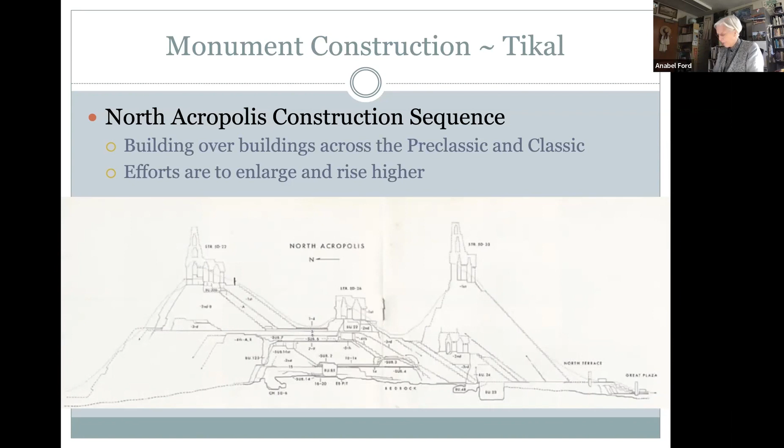So I give you a little sequence here drawn by Tatiana Proskouriakoff, a wonderful architectural artist of the Carnegie period—this work was done in the 30s. So she recreated this. Again, it's just looking at the architecture, not the landscape.

So this is earlier going to later. You can see that the construction builds over and up and bigger, but it's not creating lots of room—it's just making a bigger impression. Everything just moves bigger and bigger and bigger. The main pieces are still there, but it's exaggerated over time.

This one has a few palaces, so there is some interior space, but the platforms themselves are much bigger than the interior space.

Doorways are kind of important, so I wanted to mention that since you're architects. They use lintels, and for the most part—there are a few examples like at Yaxchilan—they have lintels that are carved monuments, in fact removed and taken to places like the British Museum.

I was there one time and I quite forgot—they only have one or two American section exhibits, and I walked in and there was one of the Yaxchilan lintels. I got close to it and looked, so close to make sure it was really the real lintel, and I set off an alarm.

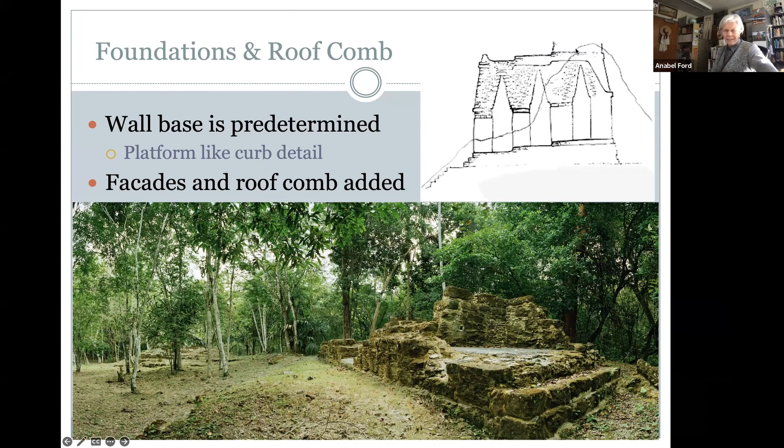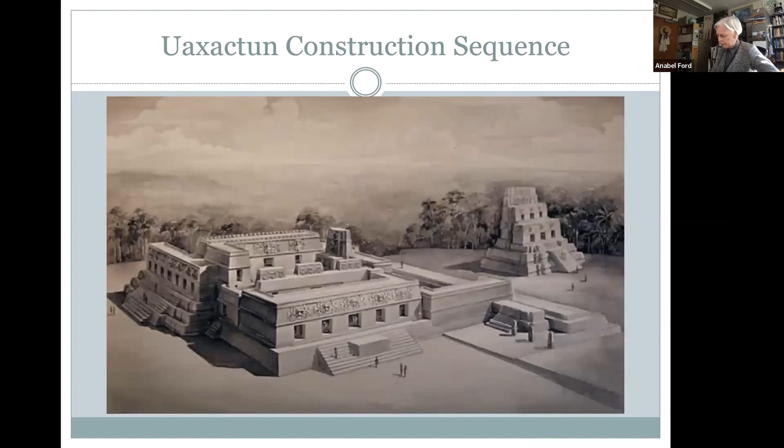It's the only structure that I really see at El Pilar that had a roof comb. These are roof combs - they're just to make things bigger, they're not structural, you can't go in them, and they probably are putting a whole lot of weight on these things.

This is another view of different ways they would be building. Of course, the solid buildings - I don't know if you've seen some of the buildings at Angkor, but they are also corbelled, though they don't have this seal and are rounded on top, where the Maya felt they had to add this detail around.

This is completely - whatever the difference between building a structure and architecture, according to Paul Bailey, a vernacular architect who worked with me for a while - he said architects want the art of the building rather than just making something functionally a building. So this is something that is the art of the building.

Another thing you've probably heard that I consider mythic is that the Maya had to cut down all the trees to slake lime. I'll talk more about lime later, but I want to mention that when you look at these rubble-filled walls, they have marl and rubble, but they're not filled with lime plaster. What they do is seal these elements with lime plaster, so they use lime very, very sparingly.

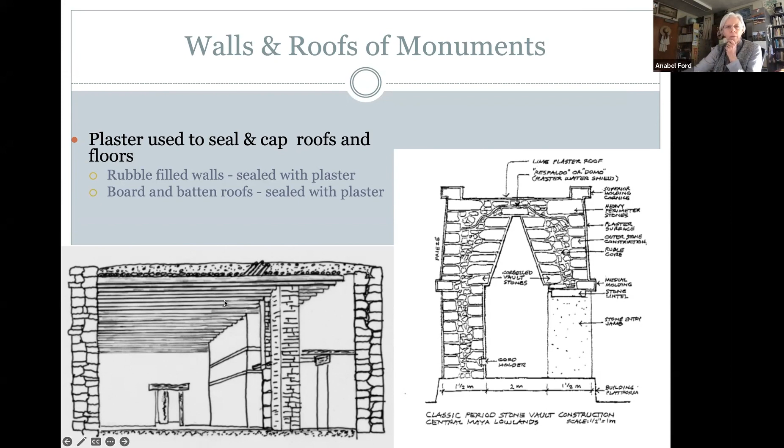Of course, the facade would be stuccoed. So this is rubble filled, and all those structures I was showing you would have been rubble filled, but some have board and batten construction. I suspect we see some of these possibly in the residential component, but mostly you see lower walls with thatching that goes up with poles. Still, this board and batten is another strategy that's seen.

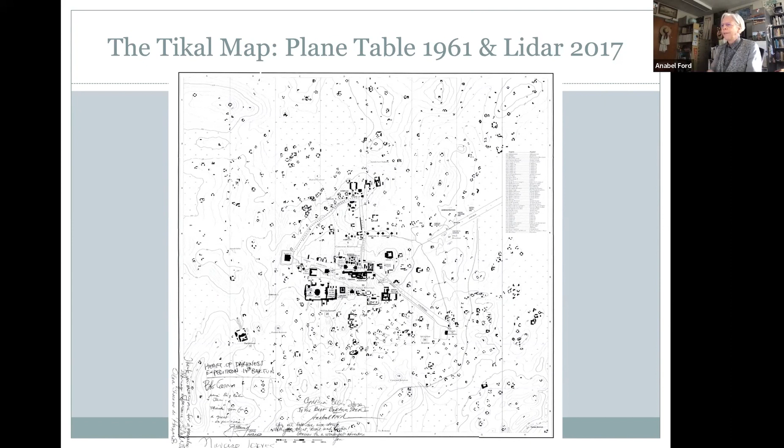They did different things, but today this whole place has been mapped using LiDAR, but if you look at the maps, they're very, very comparable.

They try to say you can see more with the LiDAR, but I don't think so. I think their map is extraordinary. What you can see now in the LiDAR is different than what it showed in 1960, but overall the map is superb. I mean, do you want to spend time with people or do you want to do the LiDAR? I guess we want to do the LiDAR now, it's easier or something, but the map was still very, very effective.

So one of the things, to build things of stone and rubble, you have to have stone. And the one thing we have tons of is limestone. There's no problem getting limestone.

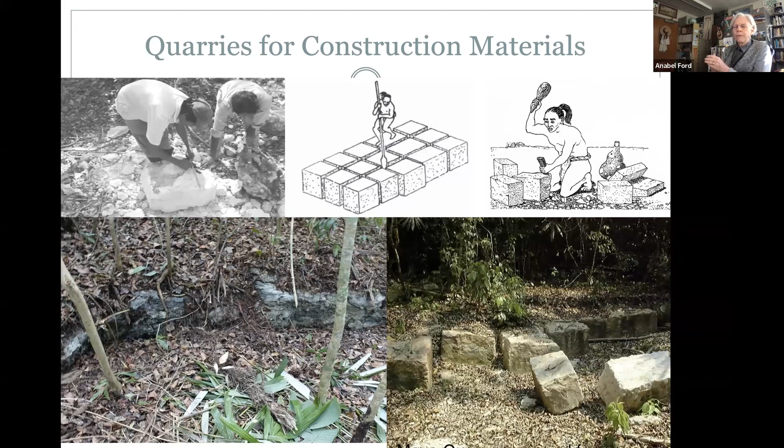I'd say scarring the landscape with quarries is an interesting thing. But you can see here, this is a quarry we mapped at El Pilar. This is a quarry that was reconstituted to get some rocks out. Here are some ideas of how it might have been, and this is us preparing some stones for use in the building I just showed you, what I call Sunun, the house site. So this is a building material that's readily handy. Of course, you do have to quarry, so you do create lines on the landscape.

This is an example at Tikal in this area. This is a giant temple. If any of you have seen Star Wars, the first one has a view that is essentially looking from this building out. And here, I think we found that there are some 200 quarries in this area. So they probably didn't do the whole of Temple 4 here, but it probably was a good contributor to the stone required there. You might want to figure out what the landscape looked like before those quarries were there.

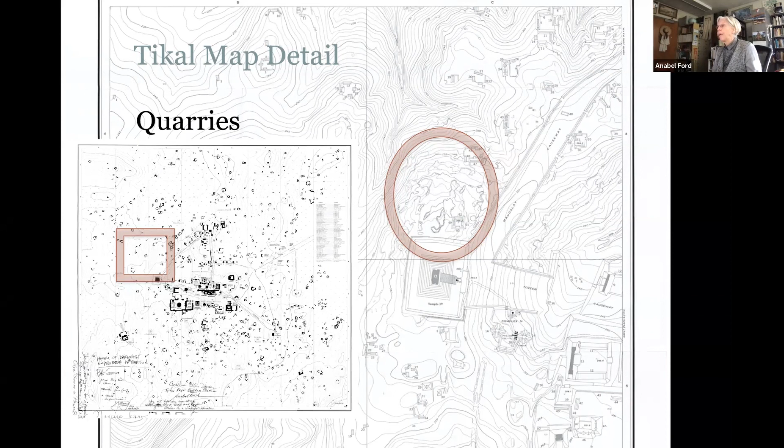Of course, the material of limestone can be slaked to lime, and lime is very important in the stucco and plaster floors. It's used considerably on the ceiling and is very important to the management of sealed spaces, you could say, from the household on out.

This has really been seen, the burning of lime for plaster, as a deforestation strategy. That somehow the Maya didn't notice the balance between needing lime for plaster and the forest they needed for other things. They simply, according to some archaeologists, would just deforest for plaster.

But really these are people who really know how to operate in the forest, because first of all, coppicing is just a big tradition and things resprout here. In fact, 8,000 years of people living in this forest would make me feel that the entire forest is responsive to cutting and burning. That would be a clear adaptation.

I did learn last year we were surveying after COVID, and during COVID there was this terrible fire that impacted El Pilar. One tree that does not respond well to it, even though it can usually resprout, is allspice, and it's a very important tree for condiments. It's interesting that it does not respond—it absolutely cannot tolerate even a nearby fire, I think. It's very unresponsive. But anyway, most trees are very responsive.

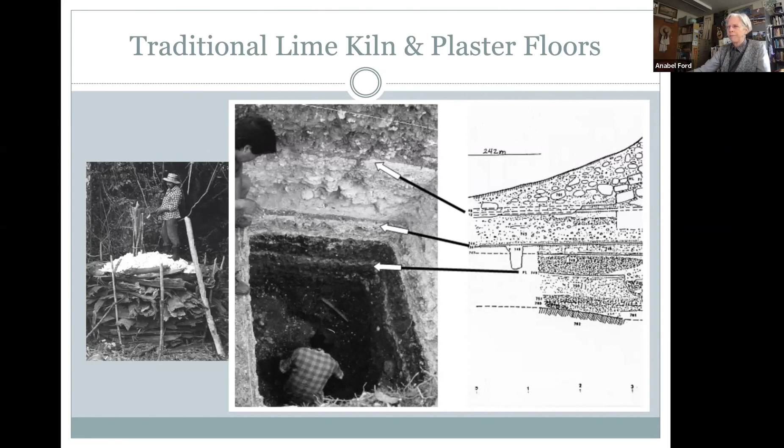I mean, so they weren't getting rid of it—there's much more to it than that. I don't know enough, but I would say there's a lot more.

It turns out that when we hit the first staircase out here, it was so beautiful we decided we'd go down and then start to go up. Instead, we found this very early floor, and we followed it all the way through. This is about 24 meters through. We just made up the little bits in between based on what we had, but this is how the profile looks.

This starts—the latest dates are almost 1,000 years ago, and the earliest dates are around 1,000 before the current era. So it's 3,000 years or 2,000 years—we're looking at 3,000 years of prehistory and 2,000 years of building here. The last ones are built 1,000 years ago, and the first buildings are 3,000 years old.

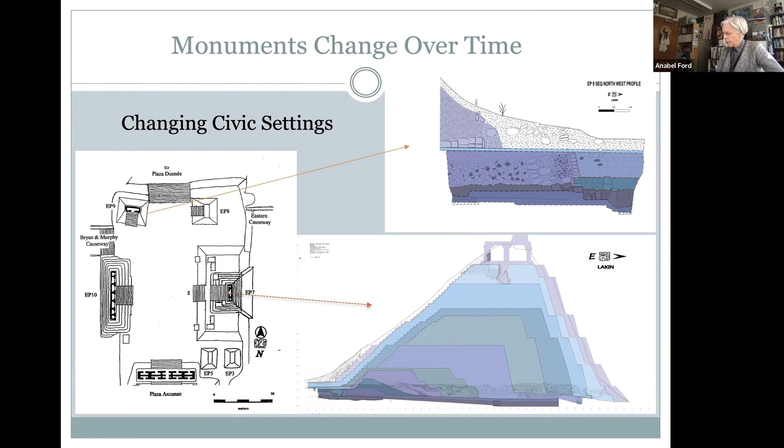Well, I'll mention another thing: unlike the Tikal example, these buildings are facing east while the final buildings are facing west. So there's a lot of changes going on in this plaza over those 2,000 years. This is a view using the LiDAR and our mapping. We've been mapping here since 2014, looking at settlement patterns. So this is El Pilar.

One thing architects sometimes look at are the axes of the monuments, and you can see how it changes. What's interesting at El Pilar is that the southern area is very publicly open, while the northern area is very exclusive and closed. So those are different ways that movement is inhibited. In fact, most entries into the north are almost like baffles, while it's very easy to walk through in the south.

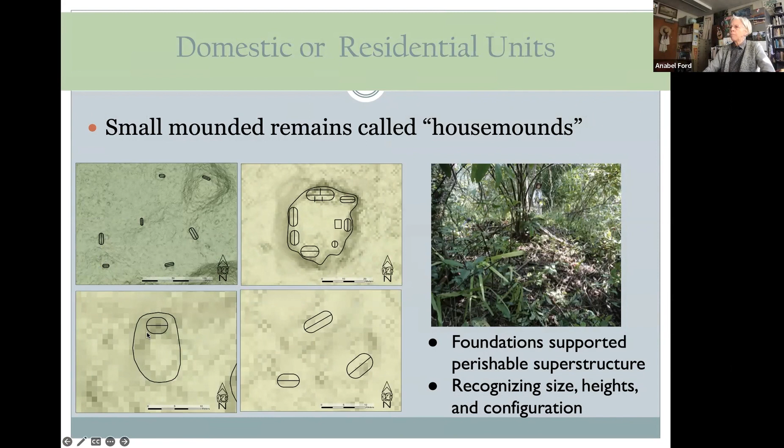These are what I call primary residential units. They range from a few that have one - like this single structure on a plaza, which we consider primary also, because of the investment in the plaza. We may not be seeing the other structures, so it's not fair to say just 1, but it'd be 1 on a plaza. So the equivalent ranges from 2 to 8, with a mean of 2.4, ranging into the higher, almost 3 structures.

This really is an example of how interior spaces are used. There's enough space for some important food things and probably fruit trees, and a number of different activity areas - open areas, wooded areas, orchards, and field crops. Beehives could be a nursery for plants, and of course today, a chicken coop and even washing areas. So you can imagine these things in the past as well.

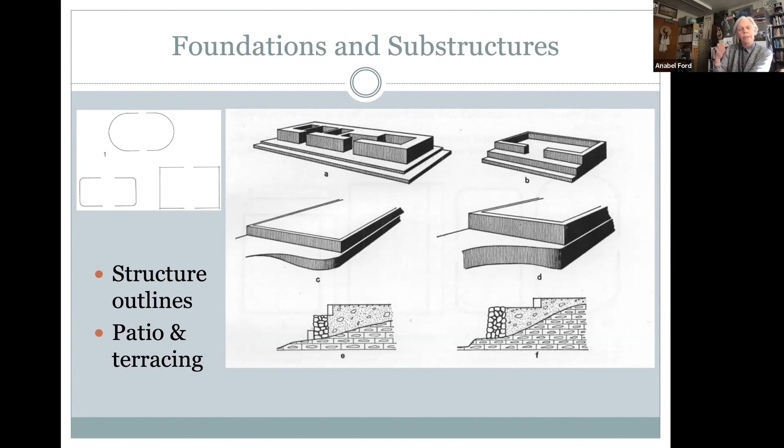A lot of these plazas, as you mentioned, can be elevated. They have different structure outlines and can be elevated and developed in different ways. Just showing here, terracing or building that platform - low walls that get the perishable structure above.

Here's some examples, this is in the Yucatan. You can see the apsidal form - I thought that was very beautiful. In fact, I think this structure at one time didn't have this walled in, and had it as storage, and then it was walled in and turned into part of the house.

What's interesting is the thatching they're using requires you to have rounded corners. If you make it a firm corner, you compromise the value of the roof, and it will always have troubles at those corners. I've seen examples where people have built model Maya houses where they've tried to make it more square, and they compromise.

They have leaks. That's where you'll always have leaks.

Just some other examples, things that might help with what we're mapping. This lower right-hand one has a real formal rubble kind of thing that you might see sticking around when you have a collapsed building, and different kinds of treatments of those lower foundations.

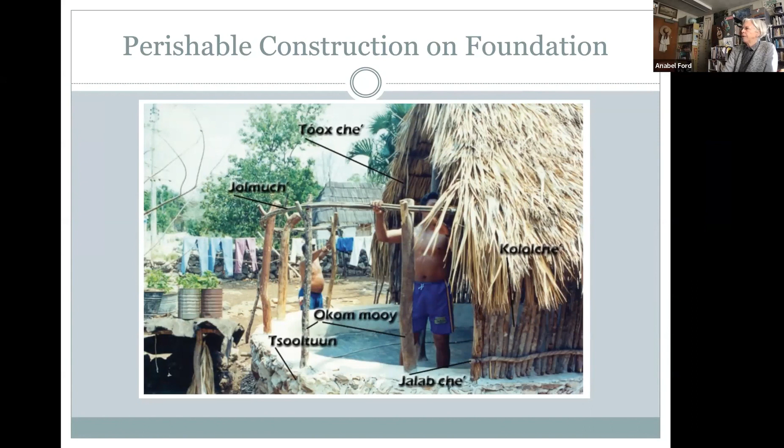Here's even one where they built out, I don't know how, it's interesting. I don't know the story behind this, but apparently they had it open at one point, and you can see the very formal, looks like cement and plaster flooring where they're building this apse or the end here. All these have names. I'm trying to learn them, I won't pretend I know all of them, but I do know those rounded things are called mooy, for whatever reason.

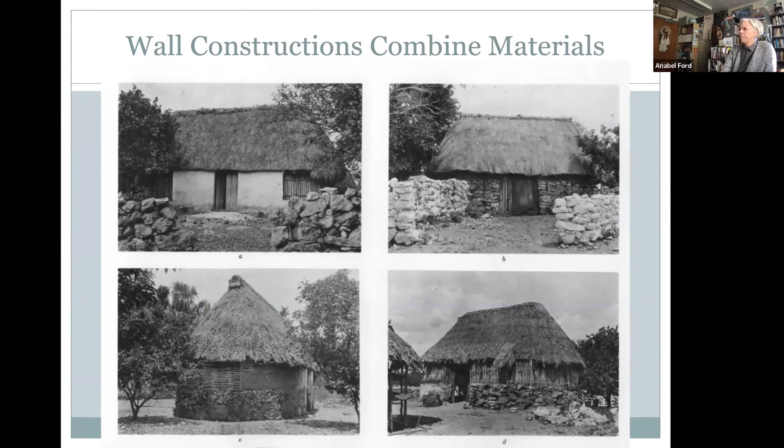Here's more examples of how we get house mounds. That's what I'm really looking at, the different ways of thatching and finishing. Thatching is really important. Here's two examples: in the upper one it's what we call the guano, or fan palm or bay leaf palm, and the lower one are corozo palms. With corozo palms you must make them square, you're obliged by the way the roofing material works to create them in a squared way. Where I work, the preference is for fan palm, but corozo exists. In the South there's no fan palm, so they always use corozo.

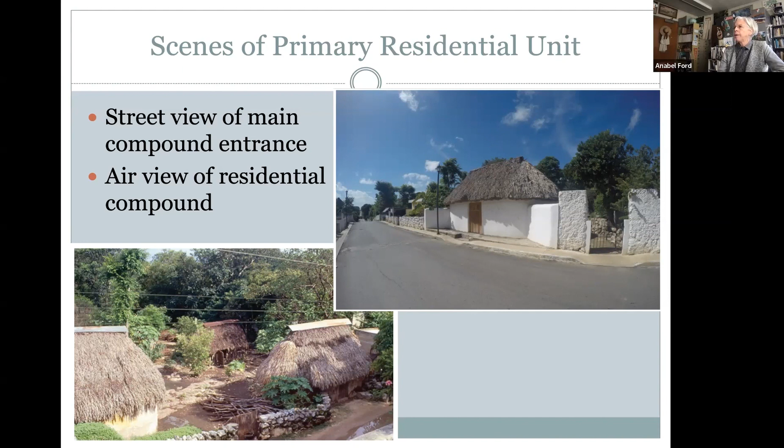Now I want to move to interiors, and you can see how there are multiple structures in these interiors. They're compounds, lots of different things happening. I showed this picture in the lower left to my team and said, this would get us confused - is that a structure or just those stones? How would we map that? Just different varied wall treatments, different kinds of features they're collecting or using. It may be that's just a bit for some next construction, or maybe a result of quarrying.

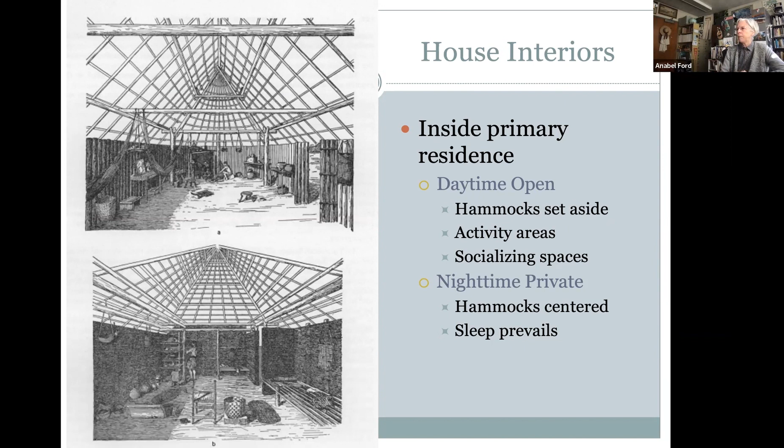These interior spaces are for activities that need to be inside during the day, and then they'll move the hammocks and it becomes the dormitory in the evening. So it's really a multi-purpose room, but not a kitchen - that's really important. Kitchens use fire, and to control where fires might be, they keep the kitchen aside. So now, not just kitchens, but all kinds of little ancillary buildings will be found for various purposes.

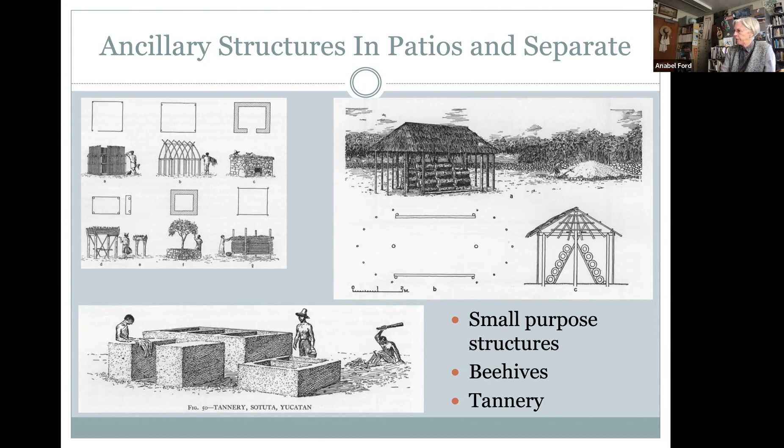I know there are kinds of trees they say are good for tanning, so that might be a kind of thing they have. But beehives are very, very important, especially at the time of contact - the Spanish couldn't get gold out of the Yucatan, but they could get wax and honey, and they were really keen on sugar. So honey was very important, and wax for ecclesiastic affairs like candles and so forth. So it's diminishing the use of the Melipona, the local bee, although people are trying to resurrect it.

It shows that they were managing water, always having it be perennial - the rainforest has flowering at all sorts of different times, so there was enough pollen for the bees. If beekeeping was important, there was management of water and flowers, we'll say. This is a kiln, probably influenced by the Spanish, but they probably could have had things like that. And then this other thing is called a sweat bath, so we know they have sweat baths - that's another kind of patio use.

Out in these peripheral areas, they'll have corn cribs, and these little seed beds for nurseries. Of course, these look less formal, less likely we would find them archaeologically, but some of these get more formal with some amount of foundations.

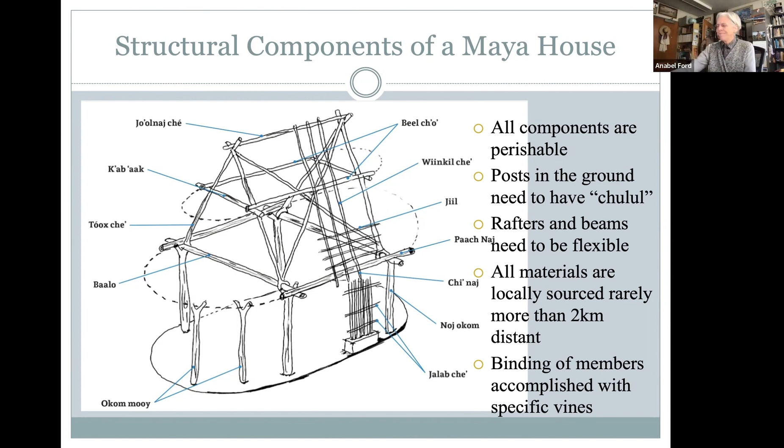So if you have a house, you need posts that have the heartwood, and you need vines long enough to bind. You can splice in, but there has to be a certain minimum length. It's interesting to me that if you burned a field, you won't have vines. If you think of the whole area as agriculture, you won't have vines, you won't be able to build. This is a rainforest - I don't know, it might rain.

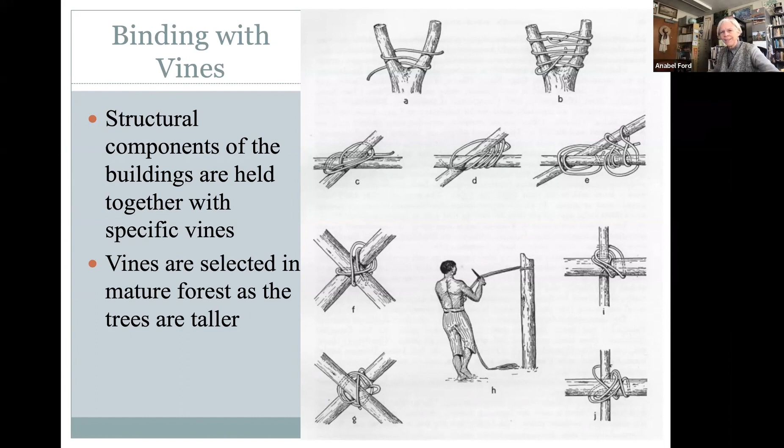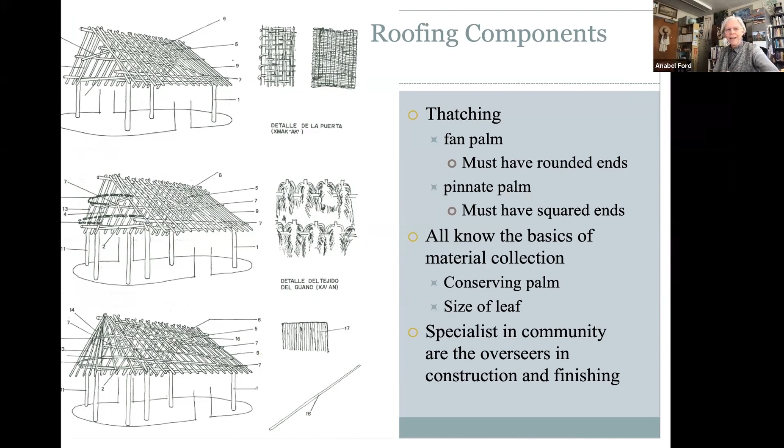This is how they put it together with the palms and the components. We have a lot of information - it's all in Spanish, this text is relatively recent but really nice, and how everything's done. The part I still don't quite understand is how you finish the roof, because now the roofs usually have corrugated iron because that's easy. But how they did this is they wove back and forth that same fan palm in a particular way that tightens it. I'm still learning how to do that roof ridge.

That's a very important skill. Everyone knows basically what posts you're supposed to use, or what kinds of things are more flexible for the roof. But there are certain people in the community that are specialists, and they will sort the thatch between acceptable and not acceptable. So in the community there'll be people that are more skilled and contribute the finer work. I don't get the feeling they're paid - I get the feeling they're part of the family, but I haven't investigated that part. I'm just more interested in the skill.

My family are from Ireland, and my Irish family there talked about how even though they could butcher, when they had to kill a cow or whatever, they would call in their neighbor who was a specialist and really knew how to do it better. So you can think about the community having specialties, and building is a very important component. Anyone seems able to build a kitchen, but not a home. These homes would be 24 by 15 feet - so they were talking in feet.

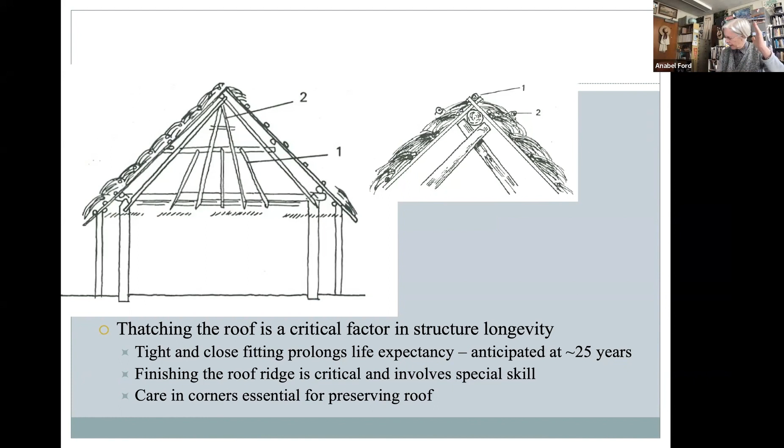Another important thing is life expectancy. The fan palm is expected to last at least 25 years, whereas the pinnate palm, the corozo, really isn't expected to survive more than 10 years. So there's also that factor, and it's based on how close you bind them and other things. These houses are perfect in the tropics though - they're cool inside. The situation now is building with concrete and iron is not a good idea.

Anyway, I think I'm coming towards the end - how do we honor these monuments, and how can El Pilar be a living museum in this Maya forest. I also want to mention we call them monuments, not ruins, because who would want to go see a ruin? Come and see the ruin of my house or whatever. You'd want to see something that is really remarkable. So I'm sad that they've been called ruins.

So in my community around 20 years ago, we did a little mobile workshop to a lot of these monuments. We were at Tikal, and they said, why do they call them ruins? I looked it up in the dictionary, and it says 'everything destroyed.' So I've decided that I will honor and respect them, and I feel we really need to reevaluate how we present them.

That's why I've talked about this archaeology under the canopy. If this forest is as important for biodiversity, why are we clearing it to see monuments? We can see them framed, or framed another way, really creating a new aesthetic, harking back perhaps romantically to Catherwood. But Catherwood didn't know anything about the trees - he did good presentations of the monuments, but he really didn't know anything about the trees. We would like people to learn that these were trees the Maya lived with for 8,000 years, and what we're looking at is whatever they sustained and allowed to sustain.

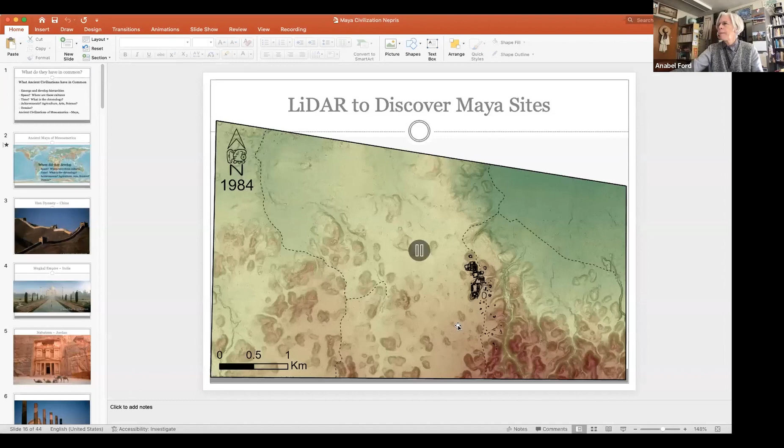If I can find one here, I just like to show it because that opposition becomes something different if you... oh dear, I'm gonna have to screen again. No problem, no problem, yep. Find the right share here. I sometimes hit the wrong button. Let's see, is this one I want? The share's coming through, yeah. Okay, so I'm gonna have this show.

I think, of course, you're right, and I like the idea. I mean, is it competition? It's both. You have to have a tree to build, you have to have food to eat, you have to have shelter, you have to have space, whatever.

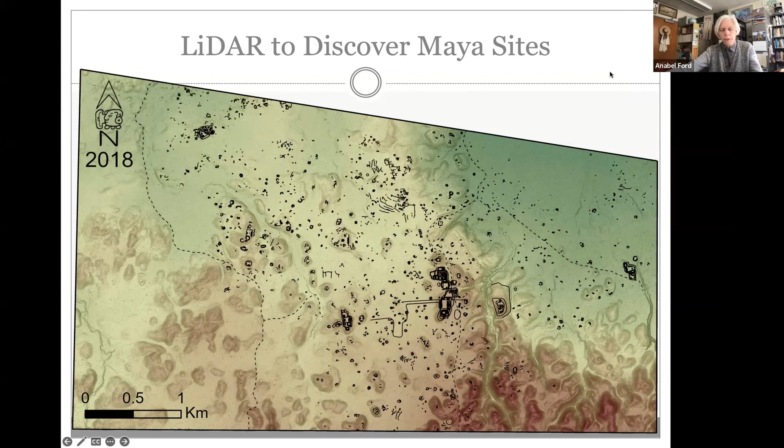Oh, I got the wrong one. This is a nice one, but that's not the one I want. I want the one, if you can wait again, I don't know. Let's see if I find the one. I want the one that is the Milpa cycle. Let's see, yes, yeah, the 20-year cycle.

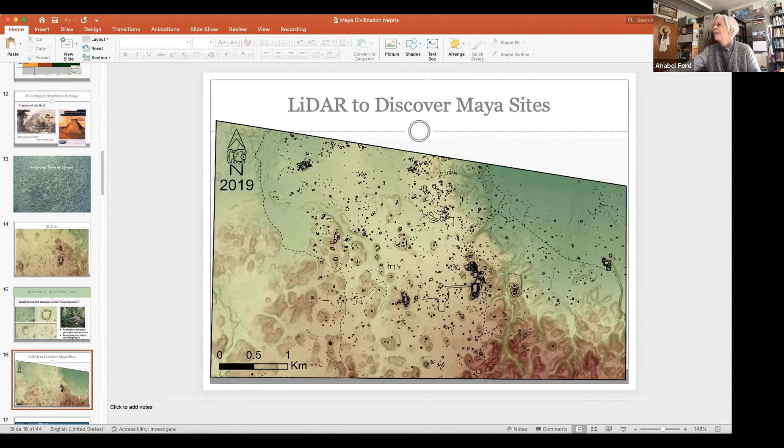Yeah, because what we have now is we've worked at, have to give me a chance to look it up, because we have basically 80% of the landscape, I'm going to stop sharing and see if I can't find something right here, but 80% of the landscape at any one time is not in annuals, and so at any one time, and it's asynchronous.

If I can find my little guy, it will be a very big help because it's really a good example. But let's see, you have the building and food. So you have to resolve those things, and it turns out it's not Malthusian. It makes me mad that I didn't think about that. It seems like all your questions were more about the research, the Milpa cycle. But I surely have something on it somewhere. Oh yeah, well, oh wait, I think I did see it. Oh dear.

I'm sorry to cause this problem. I mean, it's all fine, and we can sort of chat around it as well if that's easier. Here it is, I have it. It really is a neat little example. And I'm not on share though. It's very complicated here, sorry about this.

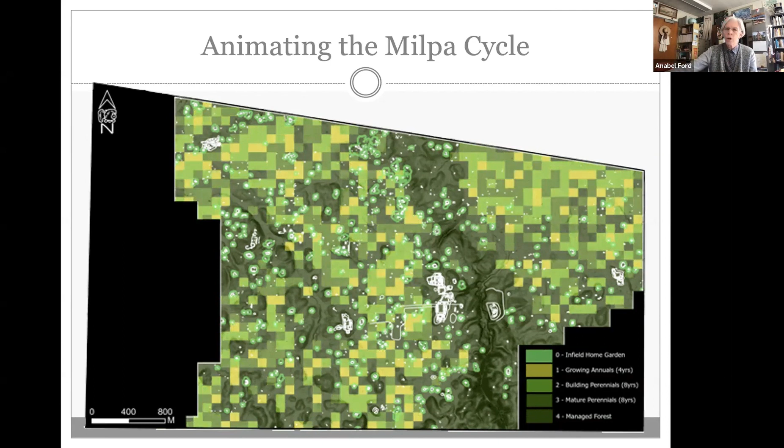There's that book called Tending the Wild, and I don't like using 'wild' because I think this was a cropscape, and I think you can really see it as a cropscape where every part of it was managed. The dominant trees of the Maya forest are 20 dominant trees, and they are all useful. So I feel that they're selecting based on their needs.

For example, the corozo, you can't burn it, and the only way you can get it to die is to eat its heart, and it's good. So they would eat its heart, but there'd be certain plants that you couldn't eliminate, so you'd have to build a reason to use them. It turns out the corozo palm is useful for oil and for construction and all kinds of things. So that made a good, what do you call it, a subsidy from nature sort of thing.

And sort of to pick up on this question about sustainability, resiliency, a landscape versus a cropscape, and impacts on cities, and then also the question of density. It sounds like there's an ongoing debate within your discipline about what was the population of the Maya. I imagine it was different at different times, but is there some new consensus on that, recognizing the dependence on this very sophisticated and specific cropscape management of the forests, and, I guess I'll use the word agriculture just for lack of a broader term, because I think agriculture imagines that the plow is now in the picture. So have you, in your research, thought about looking in the opposite direction, recognizing what the cropscape pattern was and the cycling between forest and planted annuals? What kind of population could that have sustained?